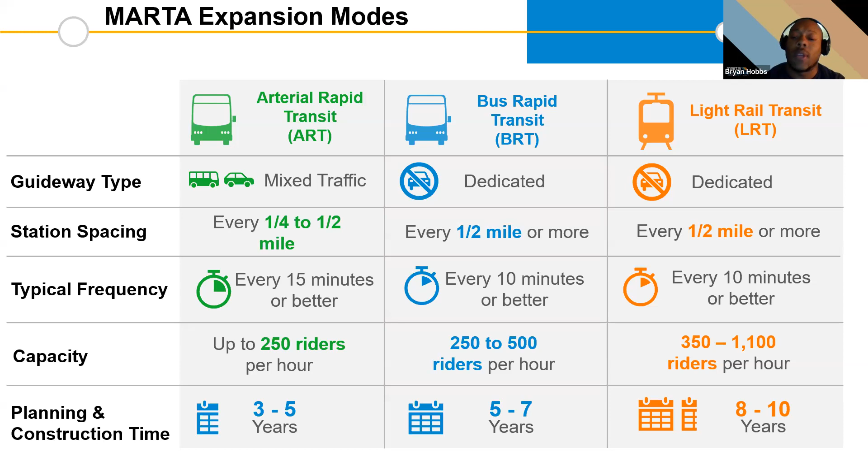This isn't about speeding through neighborhoods, but about reducing the number of stops and getting people to their destinations a lot faster. One thing I'd also point out is the planning and construction times for each mode: we're looking at 3 to 5 years for arterial rapid transit, 5 to 7 years for bus rapid transit, and 8 to 10 years for light rail transit. So this gives you an idea of the different modes you'll hear about as we go forward and discuss the narrowed-down alternatives.

So let's get into the Screen 1 alternatives. When we came to you a few months ago, we came to you with 10 alternatives.

4 of those alternatives were BRT, bus rapid transit alternatives, where we had multiple options with regards to the terminus station. Each alternative utilized some form of CSX right of way. As you know, we've been having conversations with CSX, as we said before. Those conversations have gone well so far, and we continue to hope to have fruitful conversations and come to some agreement on utilization of right of way. That is something we continue to pursue.

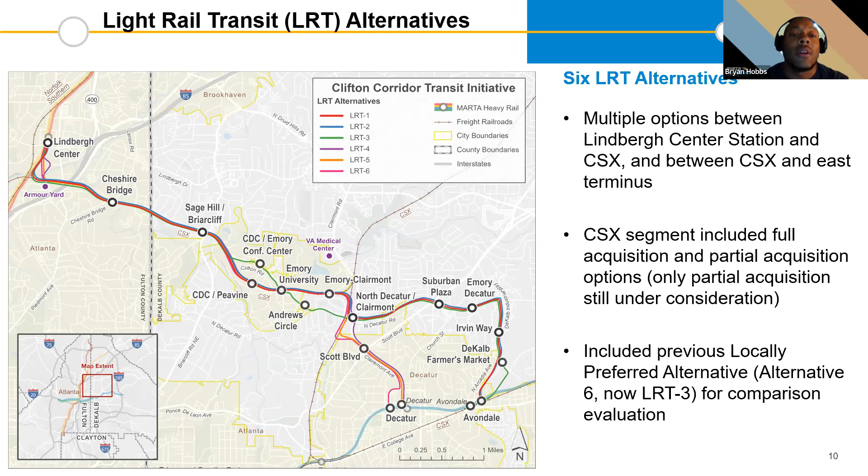I will point out as well here with the LRT, our current LPA, which is in green, is included, or was included, in the Clifton Corridor study here from the light rail alternatives.

Now we'll talk a little bit about the evaluation and how we narrowed this down to 3 alternatives. There's methodology, stakeholder public feedback, and results. We took all of this into consideration to get to the 3 alternatives that you're going to see here in the next few minutes.

That stakeholder and public feedback - we did a lot of canvassing. We had an online survey which was open for 45 days. We received over 1,000 survey responses; in fact, 1,765 survey responses came in. We had comment cards, map notes, and question and answers for our in-person meetings. We had virtual meetings such as this one, with virtual chat, question and answer during those meetings. We also had a project website with a project email where we received emails about the project, and a comment submission form. So there were multiple ways in which we were soliciting feedback from the public and stakeholders.

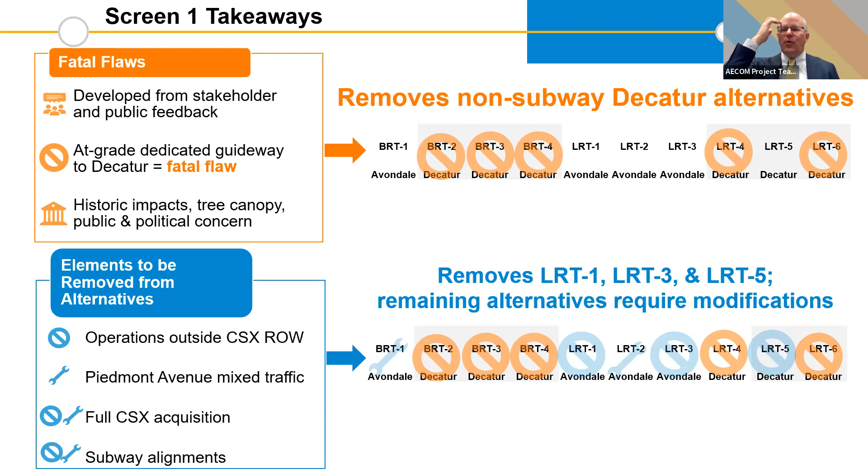But any other portions where it seemed like subway was the only way to deliver a project, we were really looking for other options. And we got to the point where we really felt like those subway segments could be eliminated from consideration at this point.

So with all that, it really led us to focus on two of the alternatives that were previously presented. What we referred to back then as Bus Rapid Transit 1, and we'll show these to you on the maps. Bus Rapid Transit 1 was Lindbergh to Avondale with dedicated lanes virtually the whole length. And light rail transit alternative 2 was the same thing, Lindbergh to Avondale with dedicated transitway the entire length.

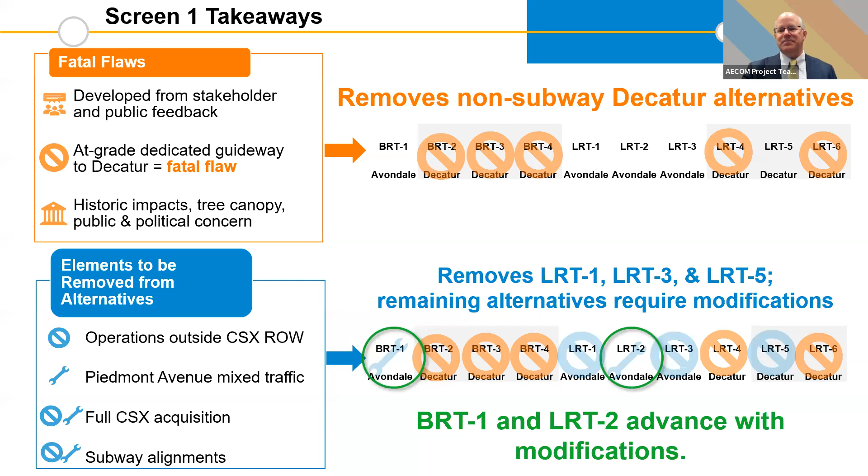And so it was variations of those that we are recommending advancing. And then we've got a third one that Bryan will describe to you in just a moment. All right, thanks, Peter. As Peter mentioned, I'll speak a little more on the CSX collaboration as we get into the alternatives, the build alternatives and the recommendations going forward. So we're looking at 3 build alternatives and 1 no build alternative.

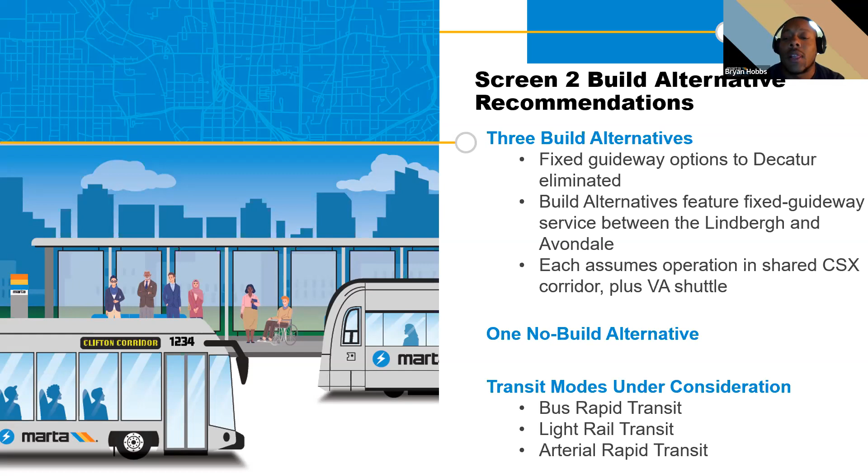So as Peter mentioned, fixed guideway options. What we did do is eliminate any fixed guideway options to Decatur. And then the build alternatives do feature fixed guideway service between the Lindbergh and Avondale stations. And each alternative does assume operation in the shared CSX corridor plus a VA shuttle, which you'll see here in a minute. And the different transit modes under consideration, bus rapid transit, light rail transit, and arterial rapid transit, you will see in the corridors.

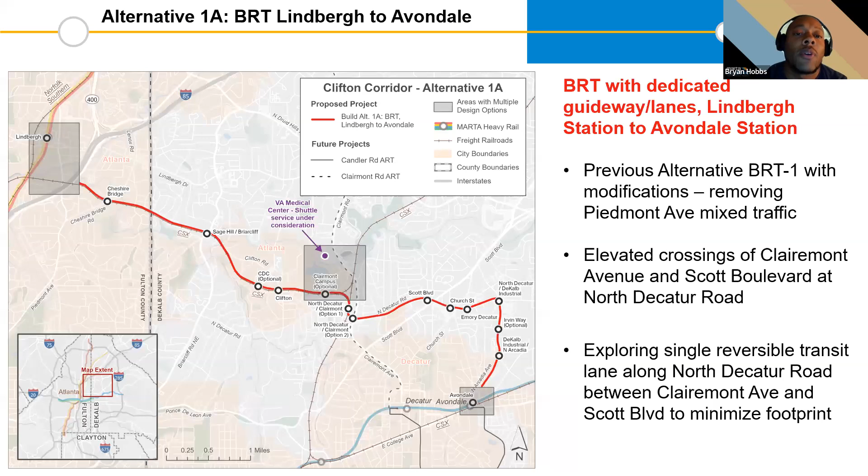And I'll speak a little bit on the CSX piece. The conversations with CSX continue to go forward. They've been great so far in the conversations we've been having with them. And I will reiterate, we have not signed anything with them yet, however, we are moving forward and evaluating and figuring out how we're going to work together here and if we can make this work. And that is something we haven't really done in the past in this manner. And so that is why we're now looking at utilizing the corridor in this way.

Because we heard so much about, hey, we did not want to expand the right-of-way going to Decatur and going down Clairemont Avenue, but we also think that more transit should go to Decatur. This is the best option to give you more efficient transit to Decatur without expanding the right-of-way and also allowing for more ridership along the Clifton Corridor.

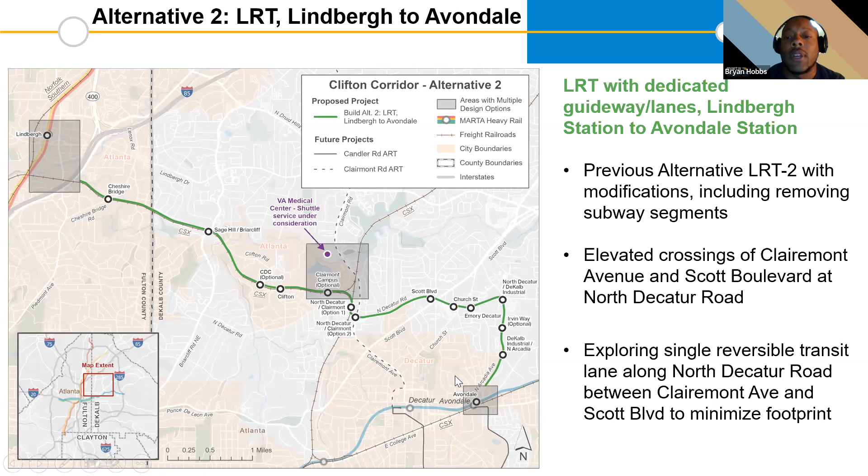It does have a unique transit line and vehicle branding. ART routes are uniquely branded, and so that's something you can see as a differentiator from our local buses. And then station amenities. So the station amenities are upgraded, essentially, from our local bus standpoint: shelters, arrival screens, off-board ticketing, things that you typically would see at some of our rail stations, as well as our BRT stations, you can see at an ART station.

And then transit signal priority. We like to implement transit signal priority on ART routes. We will be doing it on BRT routes, but ART routes as well will use transit signal priority. So that is what we're considering going towards Decatur, the Decatur route.

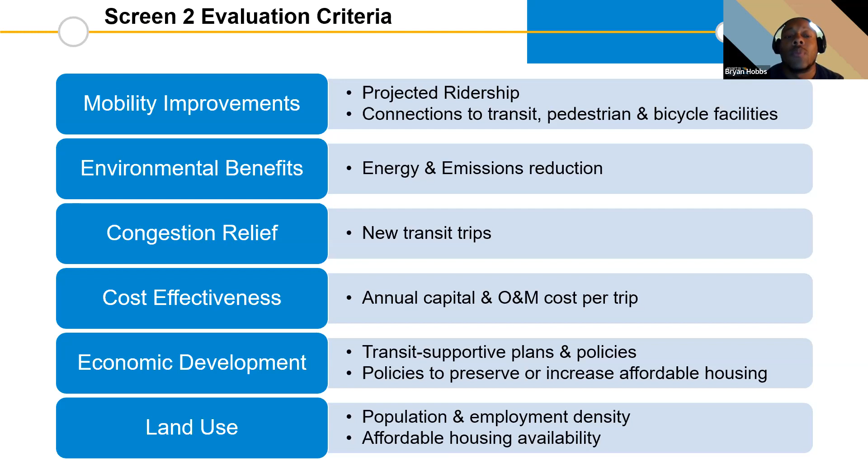So that brings us to what we're going to be doing here going forward, with the screen three evaluation and results. We'll come back to you in early '23, January or February. We'll look to come back to you and present what will be the one preferred alternative, which we will then have public comment on. That one preferred alternative, after we have public comment on it, we will then look to see if we can get this in front of the MARTA board for recommendation for the MARTA board to make an adoption in spring of 2023.

And so this is very important over the next 2 months as we narrow things down. It'll be very important to hear from you as to which one you think is the most viable, which one you prefer, and which one will provide the most benefit as we narrow things down to one preferred alternative to recommend to the MARTA board in early '23.

We do want to point out that there are several ways to stay engaged on this project. We do ask that you visit the connectclifton.com website, where you can share feedback by submitting questions and comments. You can also sign up to receive email project updates, as we do send those out regularly, and review all of the project information from previous presentations, videos, and slides, including the information from today, which will go up as well. So we do encourage you to continue to submit feedback. It is very important as we move forward in this process.

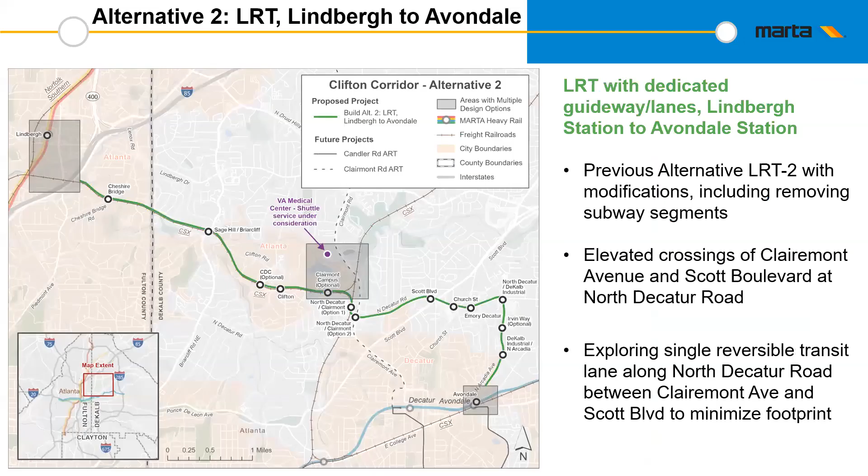All right. I'll go to a question from the chat, and there are two that I want to ask together. The first asks, what is the goal and purpose of this project? About 72% of people surveyed said they would use these alternatives. It seems there was community silence until the survey. Please advise. Go ahead. Bryan, do you mind? I think one of our earlier slides gives the overview of the project that speaks a little bit to the purpose and need. I think that might be helpful.

Thank you. Yeah, so I don't know if you're new to the area, but this project really serves a purpose of providing frequent and reliable transit in an area that does not currently have that type of transit access. The Clifton Corridor in general encompasses CDC, Emory, other hospitals, other education institutions, and a lot of neighborhoods. It is a very dense corridor without frequent and reliable transit. And so the purpose of this project is to get that frequent and reliable transit, as well as to connect this area to our heavy rail system, so that we can move people through the area.

Right now, this is one of the largest employment areas in the Southeast. And so to not have frequent and reliable transit in this area is a disservice. And so that is what we're trying to do, is provide that in this area. That is the purpose of this project. And actually, since 2012, we've talked about this and we've heard the same thing. Essentially, people want transit in this area. And so it's been a task to get to the point where we are. Local funding has always been an issue here. But you see, we have some of that, and we do now have some federal government backing. So we want to try to utilize that while it's there. And so that's what we're trying to do with this project.

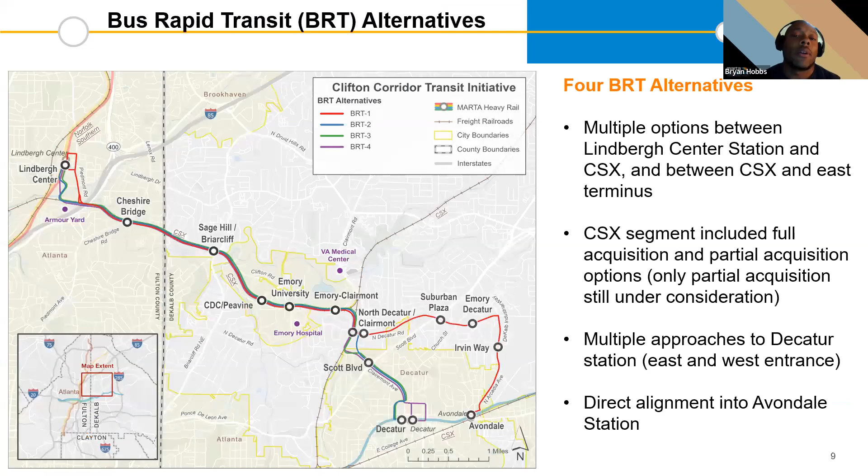Yeah, so we did not ask a direct question in the manner in which you're mentioning, and so that is something we'll look to do in this next phase of these three alternatives to narrow things down, and you still can submit questions and comments now. So it was not a direct question in regards to which mode essentially do you prefer. As you mentioned, it was, are you open to considering BRT alternatives? But that is something we can do in this next phase.

And Bryan, you have a robot voice that is visiting from time to time, just to make you aware. But I understand on the slide, and I can't actually see the slide, but can you repeat how that question was asked about the preference? Yeah, I'm sorry. Is it still robotic? You're clear now. Okay, thank you.

No, we did not ask that question directly. The question asked, did we ask whether you prefer BRT or LRT outright? It was, are you open to considering BRT? But we can ask that question in this next phase, and you can still provide us feedback for which mode you prefer going forward. Understood more clearly. Thank you.

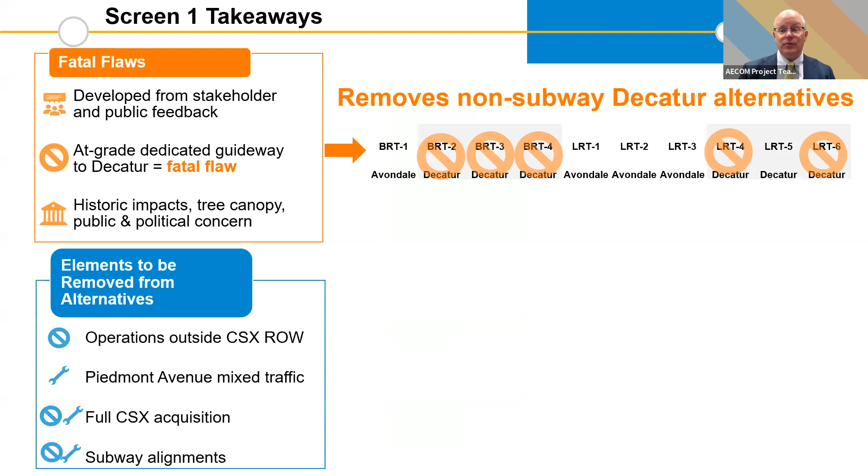Yeah, thank you. The question around the VA stop, Peter, is that a half mile? I don't know if it's a half mile. Brian, can you please pull up one of the alternatives so people can see the area we're referring to? We're doing a quick check on distance. The route still has to be formalized, but the concept is to connect the Clifton Road station at the main Emory campus up to the VA hospital. The distance, if you draw a straight line, is within a mile, but not really a direct path to get there - a little over half a mile if you draw a straight line, but there aren't straight lines to get there. We'll explore whether there can be interim stops along the way that would serve other markets. But the goal is to connect the Clifton station at Emory campus, like a shuttle from that point to the VA hospital.

Yeah, thank you, Peter. And to answer your question around commitment from other organizations outside of local jurisdiction and federal government funding - we're open to any conversations if other organizations want to participate. I think you start to get into what we call P3, a private-public partnership, when you look at that. But we are always open to conversations when organizations want to commit a significant amount of funding to these projects.

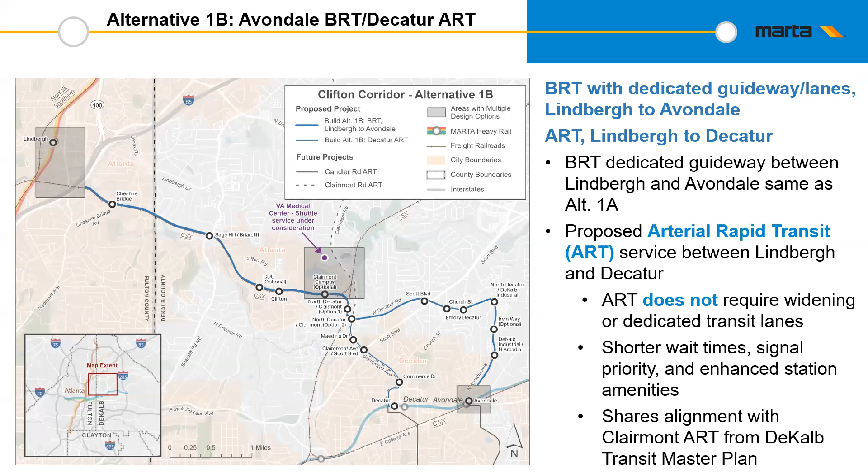Hey, thanks again. I've heard a lot about people getting out of their cars and onto this new transit option. In considering that, I think it's important, going back to the design aspect of things - if we're really expecting people to get out of their cars and onto this transportation, it's going to have to be inspiring to them. Design is very inspiring to people, and that's why you'll hear me talk a lot about that. I'd really love for MARTA to heavily consider great designs for the buses in addition to the bus shelters. It's really important for our bus experience to start looking and feeling like a train experience, because many people regularly put the train experience over the bus experience, and it doesn't have to be that way. There's one aspect we can really focus on, which is design. We can go on about better service, and I think we can and we will. But one aspect I really would love for MARTA to harp on strongly is good designs, working with American-based manufacturers to come up with better designs if we don't already have them. So that's my comment - really MARTA this time, heavily focused on design to inspire ridership.

Thank you, Jerome. That's something to consider when we get into the design phase - we will have the ability to do that. I think we'll have some opportunities, based on what's coming down from the industry, to look at some different things. We agree, because we want our bus service to mimic the rail, to give you the same experience of a premium service on our BRT routes. So that is something we are very keen on and will continue to look into. I'm looking forward to the process to get us closer to the design and all the different criteria we have to work through to deliver this project.

I have one more question from the chat, and then we'll bring in closing comments. The question is: my neighborhood is at the bottom of the hill on North Decatur Road, heading east from Clairmont. How does MARTA expect to have a semi-dedicated lane for bus rapid transit on such a narrow and heavily trafficked road? Why is going on Clairmont and then a turn onto Scott, a much wider road, not listed as an option?

Okay, I will ask Peter or Agnes, you guys want to take that? So may I ask, just to make sure I'm capturing everything, is the idea, to get to Avondale, explore going south on Clairmont and then take Scott Boulevard? Is that the question?

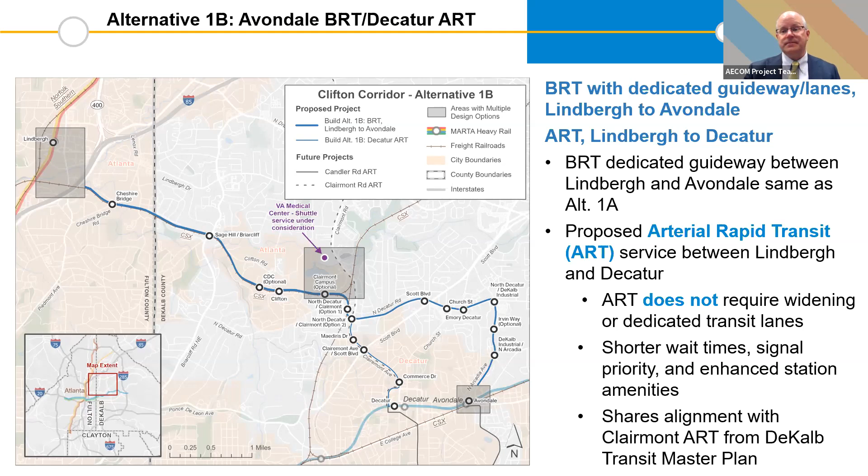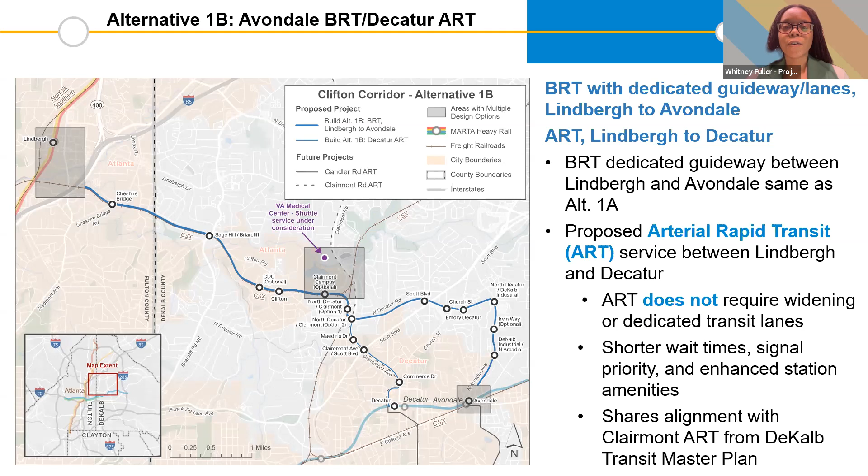Thank you. All right, so I think the summation is we have gone through a lot of work with you all. When I say we, I mean the project team and the audience, and there's still a lot to be done. This might be a good time to reiterate our technical advisory committee that we are convening. Project team, help me be reminded about when that group is scheduled to meet and what the composition and purpose of that group is.

Yeah, so we will be convening a technical advisory committee. Technical advisory committees are made up of stakeholders and individuals who really see or have some form of impact, or want to have an input or should have an input with regards to some of the finer details of moving this project forward. So that team will continuously meet.

It is made up of the cities, it is made up of jurisdictions, organizations, different private organizations, private citizens. It is made up of individuals who really know the area, as well as government officials, as well as others who can help us continue to help us move this project forward. So that technical advisory committee, along with public feedback, helps us move forward in the final design of this alignment.